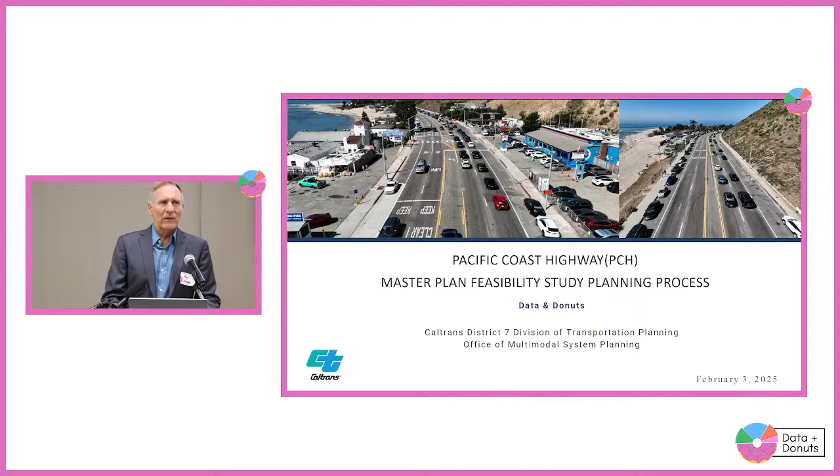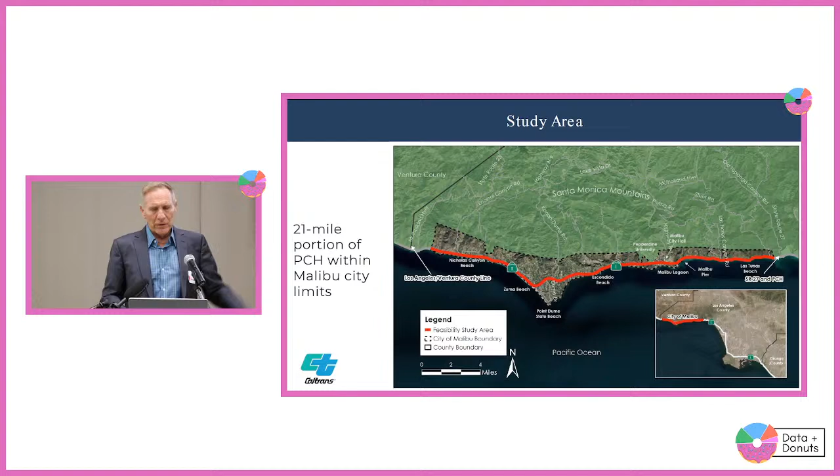That's where the initiative for this came from, and they pushed us hard with a very tight deadline. The study area for this plan is the city of Malibu. After this, we have another planning effort to plan the segments between the McClure Tunnel in Santa Monica and Malibu, and then further north on the Ventura side. But right now, the focus of this is really on Malibu.

We have a number of goals. The first goal was to reduce crashes and crash severity. When the 4 women from Pepperdine were killed a couple years ago, that just really shocked the community, on top of all the other fatalities they've been having.

And so it became a real priority. Simultaneously, you want to make safer accommodations for people who are bicycling or walking out there, as well as to make things more accommodating for people using public transit. The community, the city of Malibu—we've worked very closely with the city—they really want the Pacific Coast Highway to better fit in with the context of their community as well.

Right now, it's too much like a racetrack, and it feels like a highway running through a community. If you happen to live or work or visit that community, it's not a great match. So the goal is just to improve the character and have it fit better into the context.

We also need to preserve emergency access and access to beaches and mountains and businesses. It became very evident with the fires how important getting in and out of there is. And it's not just fires—it's landslides and other things out there that cause crashes as well. All the ambulatory calls that are out there, people need to get through. It's also an evacuation route. So these are our primary goals, and they somewhat conflict with one another sometimes.

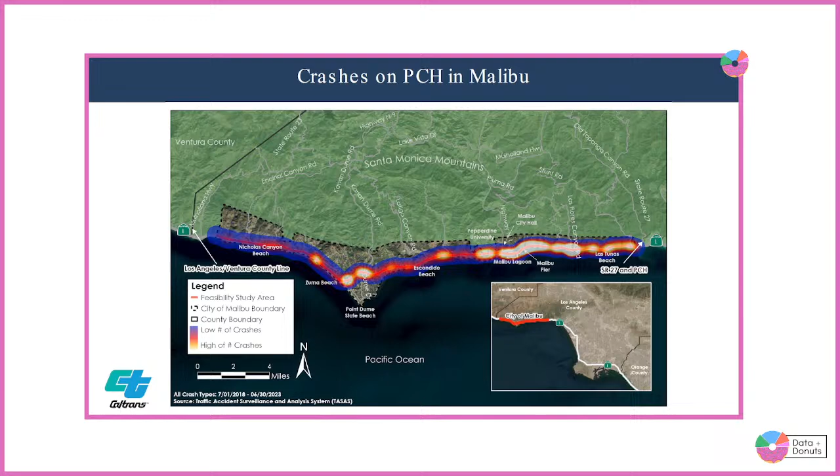That was important. We also wanted to know where the priority areas are. You see this white area here, which is where the Pepperdine women were killed. That's where we really had to focus a lot of our attention. People are going very fast there, so that was a really important area to address.

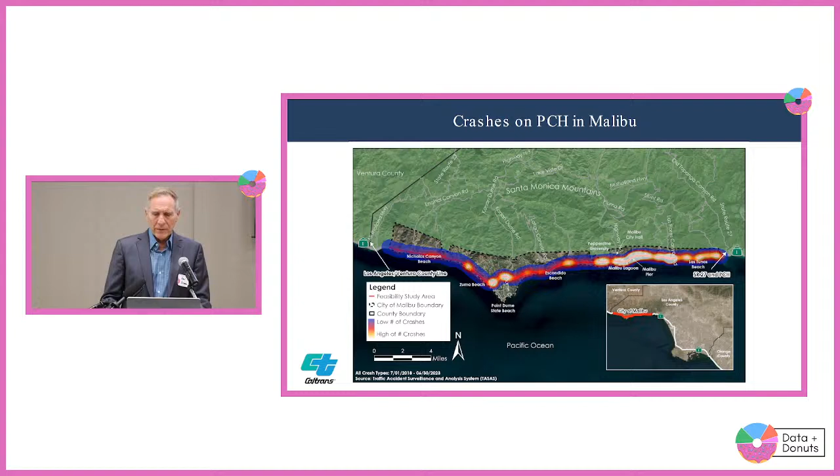We also looked at where bicycle and pedestrian crashes were occurring to try to understand that. So there was a five-fold approach to our community engagement. That was first with the community workshops and a charrette. The first one was a charrette and workshops, both virtual and in person.

We did two different rounds of surveys. We had an interactive website, which is still up. We also had quite a few stakeholder meetings, with different groups that we met with individually, and some individuals who were very connected in the community, and social media as well.

It was a bit of a challenge. One of our challenges is we had a community of people who live in Malibu who are very interested in what goes on there, and that's where we had our workshops, and we wanted to respond to them. But Malibu and the Coast Highway there, it's a state highway. It has to also serve people from LA who go to the beach there, or who go hiking there, or who go to restaurants there.

And there is an issue of disadvantaged people—this is their beach access. So having to balance responding to what the community wants with understanding that it's also serving people outside was a real challenge. How do we reach a huge audience in the whole region area?

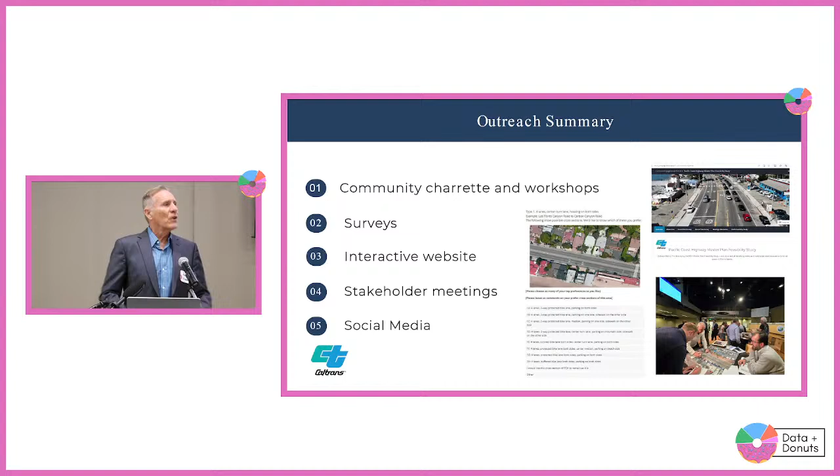We did have quite a bit of local television coverage, and we tried to spread out as much as we could, but as always, the people in Malibu thought we were paying too much attention to people outside, and some of the agencies representing outside thought we were paying too much attention to people in Malibu. So that's one of the things we ran into.

The July workshop was a really important starting point for us. This was a charrette format. If you're familiar with the charrette format, it's an attempt to get the attendees to actually participate in the formation of the plan. And we identified five different typologies of the highway and the adjacent land uses.

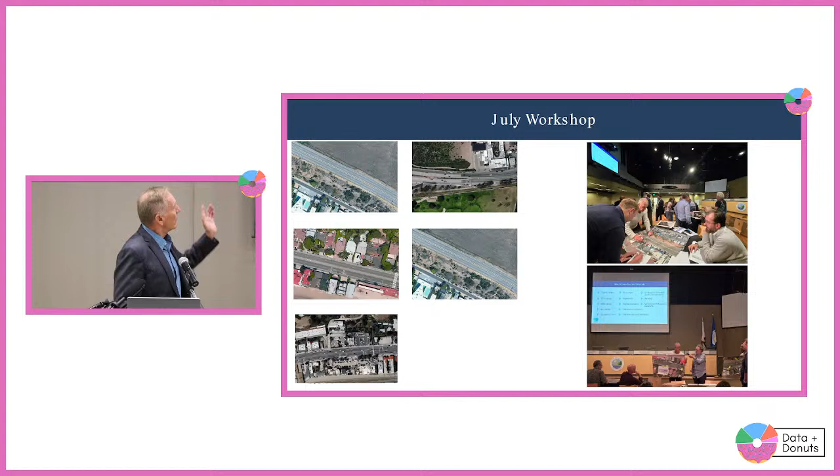The one at the top left is what you run into first when you come into Malibu, mountains on one side and houses along the beach on the other side. As you get further in, this second one is the Carbon Beach area, with housing on both sides, getting into a pretty busy part of town. Then you get to this bottom left area, which is the central commercial area near the pier.

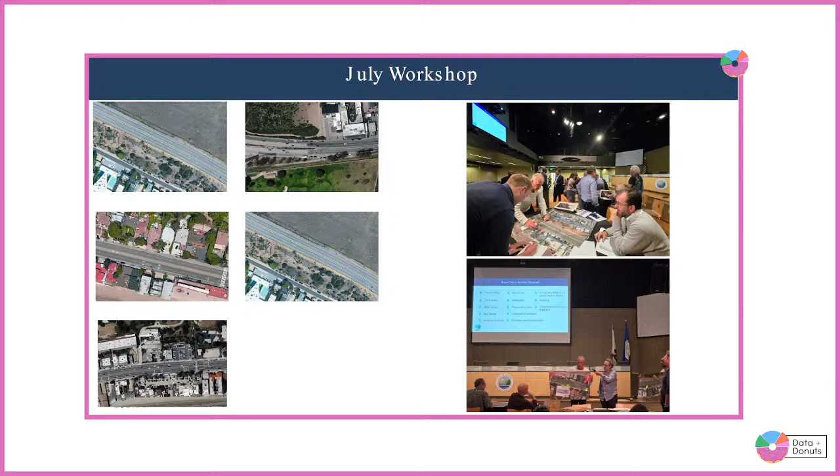And by the way, these other two types are also found in other segments of the Coast Highway. So they were representative. The one up there is a very specific place, that central area near City Hall between Cross Creek and Webb Way. And then the last one there is sort of nothing on either side of the highway. It's just open, even though there are homes closer to the beach. The highway itself doesn't have adjacent land uses.

So for each one of these 5 typologies, we broke the people into work groups. Tell us, what are your priorities as far as what you would like to see in the cross-section of the highway? We've got limited space to play with, and we've got all these different competing goals. How do we best mix that limited space?

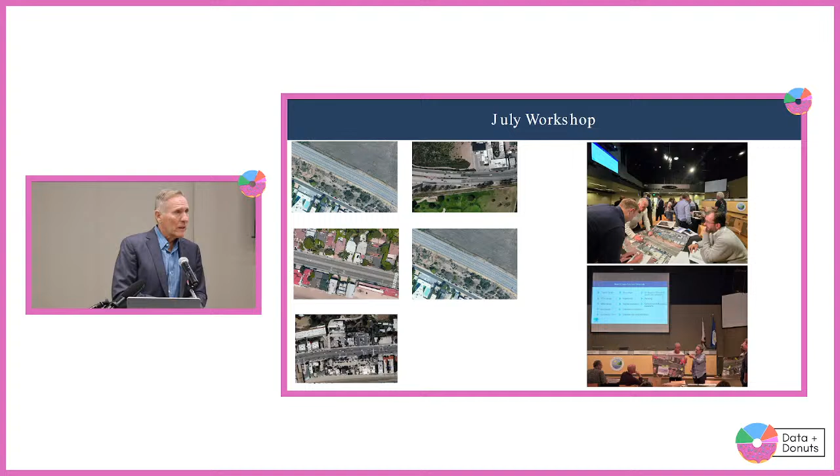So the different types of cross-section elements might be travel lanes, turn lanes, bike lanes, walking areas, parking on the mountainside, parking on the beach side, bus lanes, and a number of others. So we have all these things, and we ask people for each one of these typologies, what are your preferences?

What are you willing to give up if we can't have everything in there? What do you really want to see stay in the highway? That gave us an initial readout as to how we can start to plan, because something's got to give. We don't have enough space to do everything out there. So something's got to give if we're going to change.

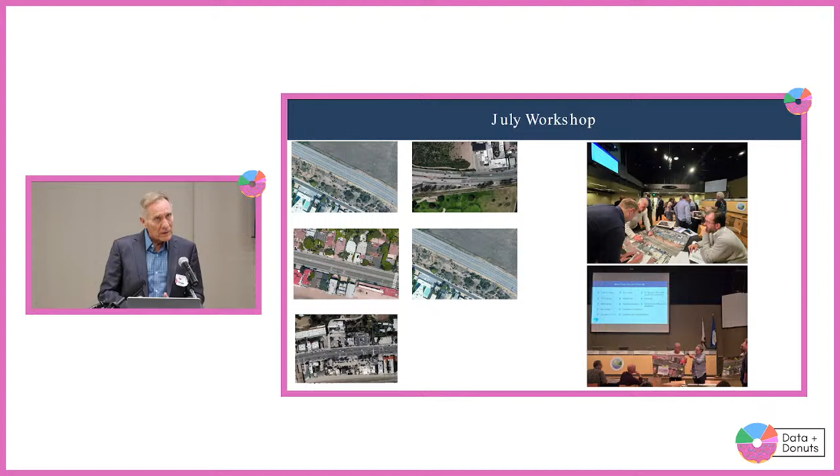Our stakeholder meetings, these are pretty much the list of the different stakeholder groups that we met with. There were some local residents who were very engaged and vocal. One of them had his daughter killed back around 2010 or 11, and he started an organization that's been very active since that time. And some other residents, one of whom just got elected to city council, but also city staff, highway patrol, the sheriff, the fire department, a labor exchange.

So Pepperdine, Coastal Commission, Mountains Recreation, Chamber of Commerce, Streets for All, Streets for Everyone, Surfrider Foundation. These were the groups that we had individual stakeholder meetings with to try to get their input individually. These were hour, sometimes 2-hour-long meetings. We really wanted to hear from all of them.

So when we had the first round, we did the charrette, but we also did the same kind of thing in a virtual workshop. We asked people, and we had this survey online. Again, for these different 5 typologies: what are your priorities? What are you willing to give up? Rank them.

Bike lanes and sidewalks came out number 1 and 2. Bus stop improvements were also very important. When we got down to parking, parking on the beach side was more favored than parking on the mountain side, but we noticed those are getting lower on our priority list. Keeping the center turn lane was kind of lower on the priority list. If we have to get rid of the center turn lane to create space for bike lanes, people seem to be willing to do that. The one thing that ranked dead last in every survey and everything we did was keep the highway the same way.

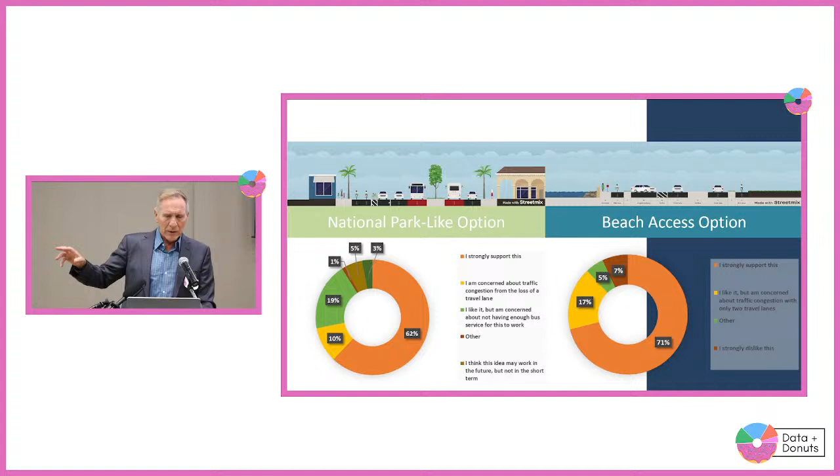The other option we put out there was a beach access option. On the far west end, the traffic volume has dropped quite a bit, and we could get by without 4 lanes. We'd do 2 lanes, which would enable us to put in angled parking on the beach side, add parking there, make sure we've got really good bike lanes, and 71% of people said they strongly support that.

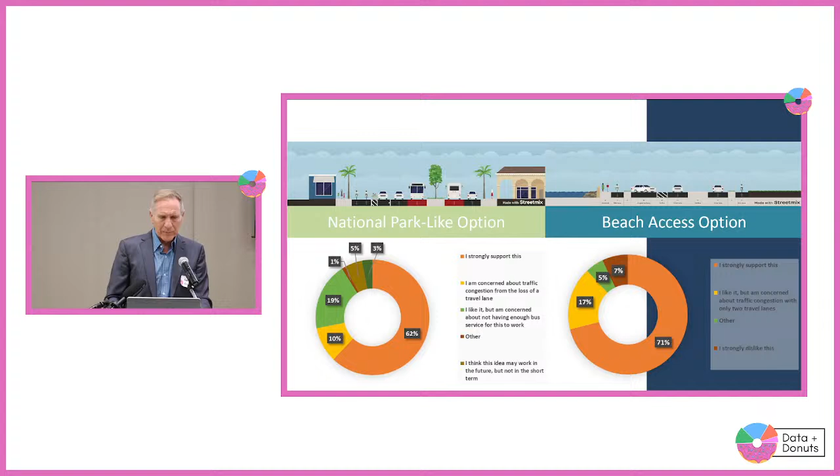So that was, I thought, interesting. So then we looked at what are the tools, the toolbox? What kind of tools can we use? What countermeasures can we apply to fix the highway?

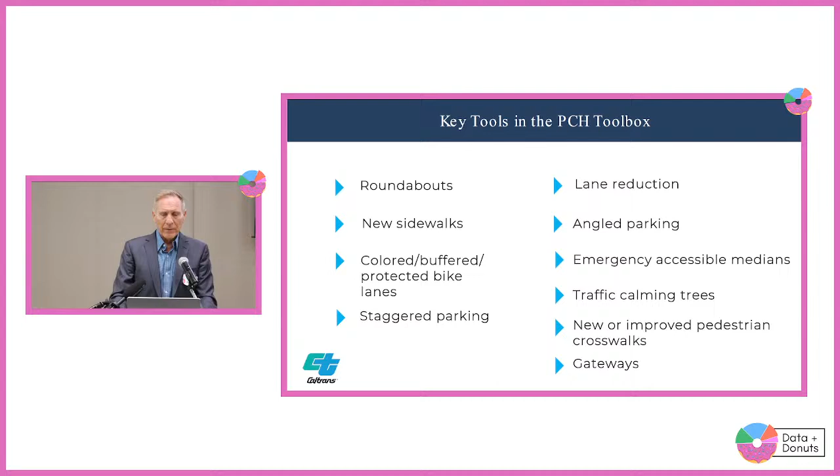People really like the roundabouts. Roundabouts do have a very good safety record. They are significantly safer than signalized intersections. They also generally have about 30% more capacity to handle traffic than a signalized intersection. They eliminate conflict points. So we proposed roundabouts at 9 different locations.

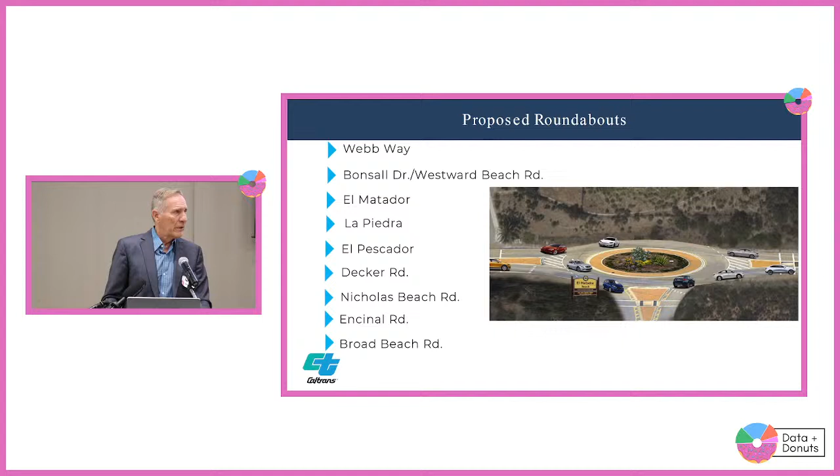There were some areas where there are no sidewalks at all, and some areas where there's no sidewalk leading up to a bus stop. So we needed to add it there, because you absolutely have to be able to have ADA access to a bus stop.

And when we're adding the angled parking, we wanted a safe place for people to walk to the beach. Right now people are parking along the beach, and they're doing two things we really don't like: they're walking in the highway from their parked car to the beach, which is very narrow, or they're parking on the mountainside and running across the street and walking along the highway. Those were two crash types we really wanted to eliminate.

By the way, last year Senate Bill 960 passed. That requires Caltrans to have good bicycle and pedestrian facilities on state highways. The segment of the Coast Highway, let's see...

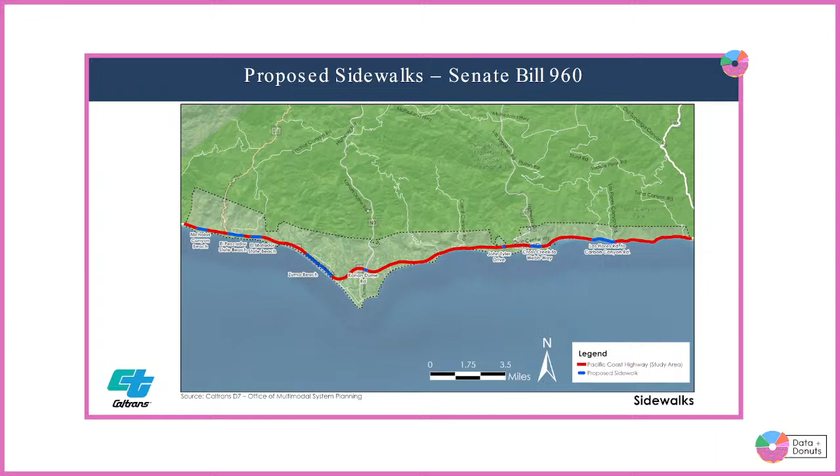Right here, Las Flores Road, Carbon Canyon, just as you're coming into the city, there are no sidewalks. There are no sidewalks, and it's very narrow. So we absolutely felt that we had to add sidewalks there.

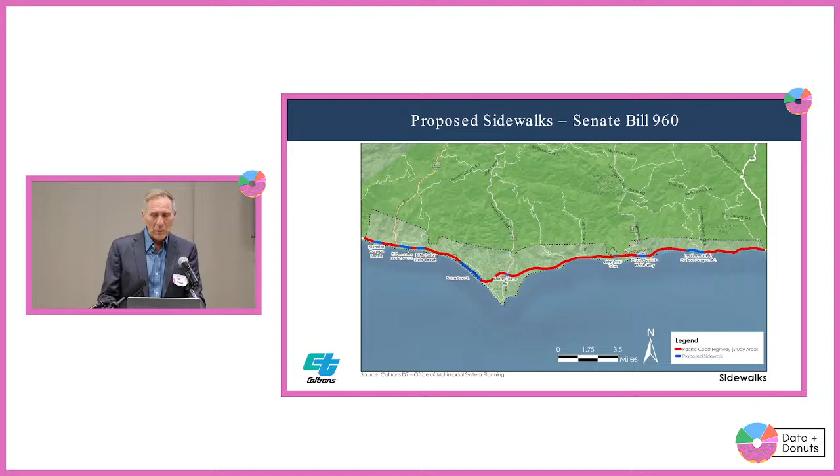In order to find the space for the sidewalks, we're proposing taking out the center turn lane. And it's a bit of an issue, because some people that live there are saying, well, how am I going to turn left and come out of my home, or how am I going to get in and out of my home? So it is a real issue, but we have to put sidewalks there, and we have to put bike lanes where we've got them. That was something we absolutely needed to do.

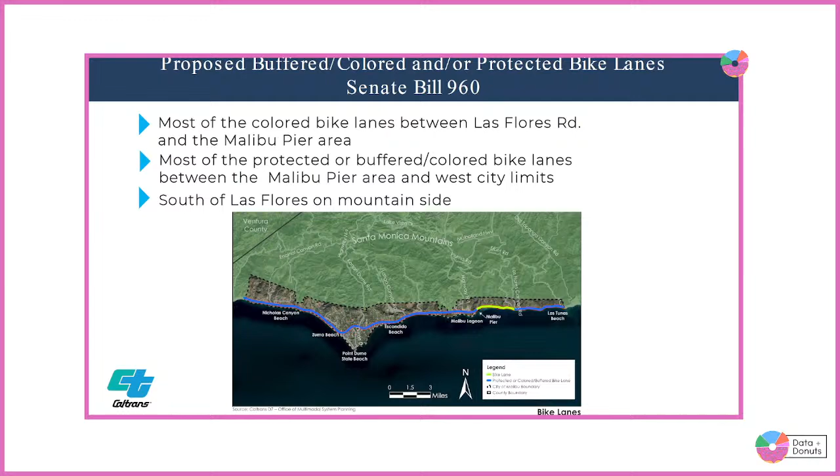We proposed buffered or colored bike lanes and protected bike lanes the entire route. Up here on this map, the blue area could either be the physically separated, protected bike lanes as an option, or the other is just what we call a buffered bike lane — a bike lane with a little bit of painted stripe separating it from the travel lanes.

Here's another issue with different stakeholders. Most people want protected bike lanes out there, but the city isn't crazy about that because a lot of the people bicycling right now are experienced cyclists, the club riders who ride in big groups. They're concerned, and I agree, that a protected bike lane will confine their movements a bit. They're also worried about trash collection, since protected bike lanes need to be swept, which is an issue with that kind of lane.

For this feasibility study, we found both options feasible. The area shown in yellow is the Carbon Beach area that just burned. There are a lot of homes along there, a lot of driveways, and it's not a great place for protected bike lanes because of conflicts with driveways and parked cars. So that area was planned to just have striped and colored bike lanes.

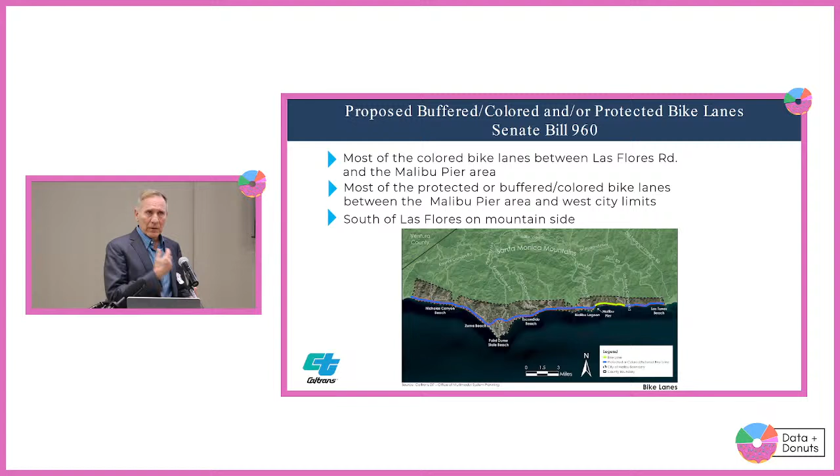We proposed staggered parking. In order to eliminate the issue of people parking on the mountainside and crossing over, and to get the space for bike lanes, we removed parking from one side, the mountainside where the beaches are.

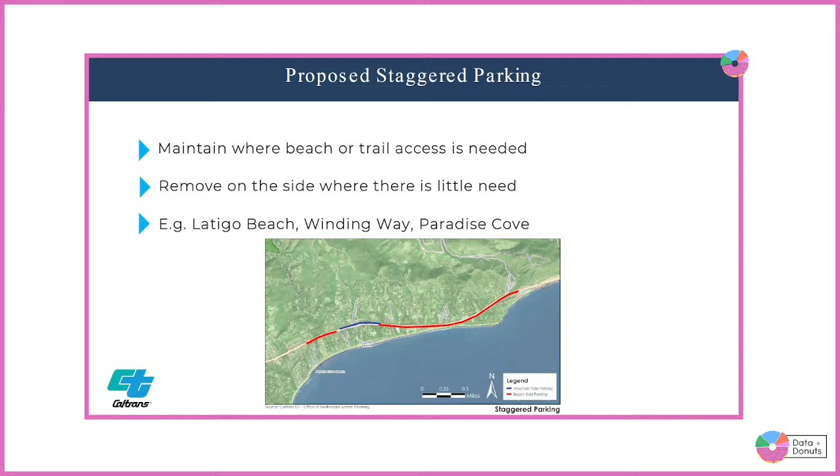There's a stretch near Winding Way, which is a really popular trailhead for Escondido Falls, a really nice waterfall. In that area we left the parking on the mountainside, close to the trailhead, since the parking lot there only has about 13 spaces and people frequently park along the road and walk. So we kept parking on that side but eliminated it on the beach side in that area.

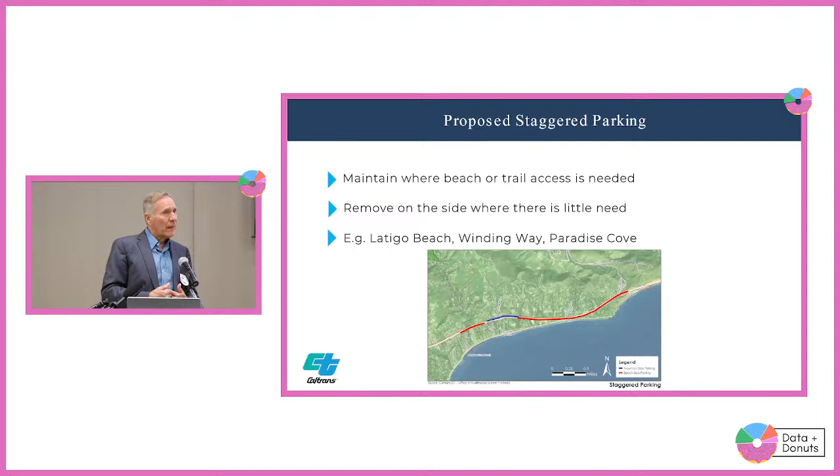These are the areas where we reduced the lanes and added angled parking, mostly on the west end.

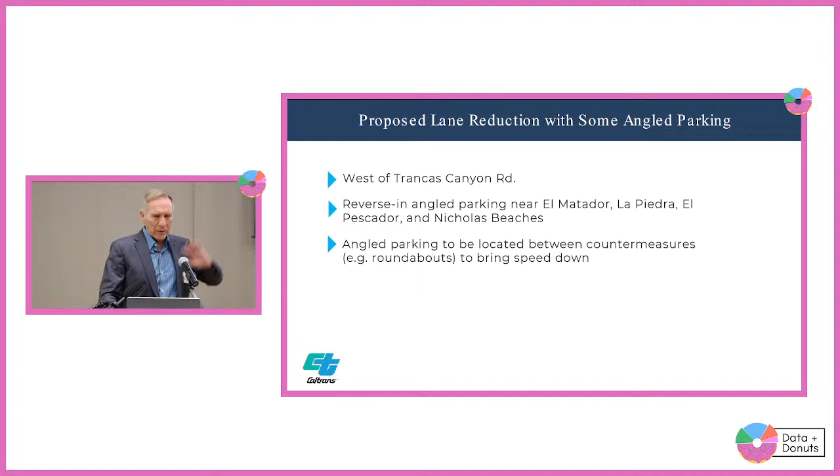Some other tools here: traffic calming trees with canopy do calm traffic. That Carbon Beach area I showed you, which had so many crashes, is where people are speeding. The guy who hit the four women two years ago was going 104 miles an hour. So we're looking for different techniques to slow traffic, and it's not easy to find ways to do that in a context like this.

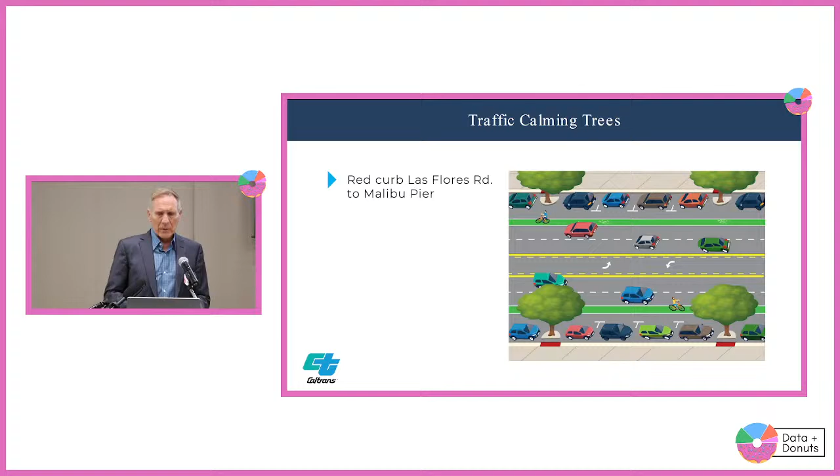But putting islands with trees between parked cars is a technique we hope to use out there.

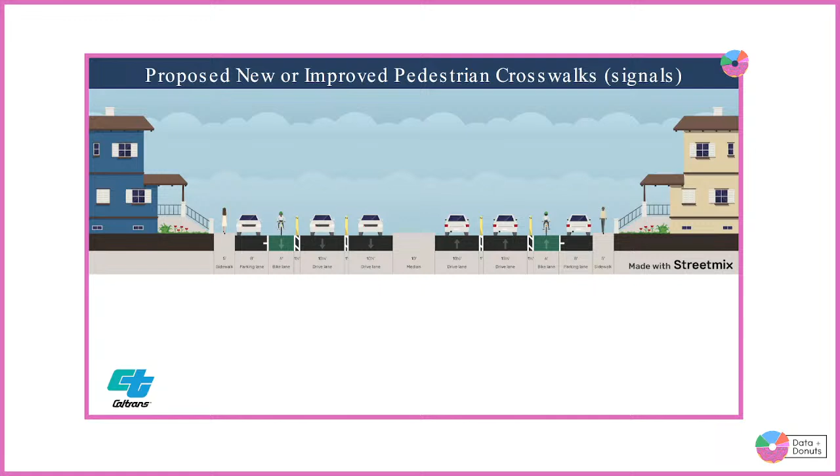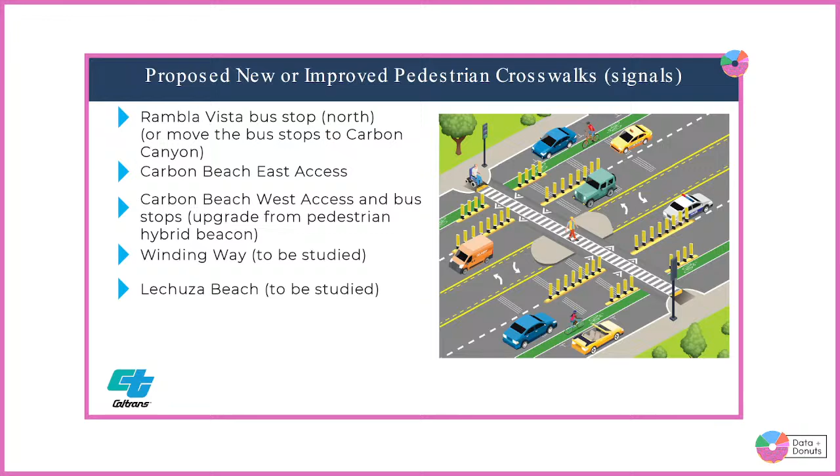We're putting new crosswalks in, and right at those crosswalks we're planning to do some things to slow vehicles down, channelize them, put in crossing islands for pedestrians, and add new signals. We put a few of these new crosswalks in hoping to slow cars down, plus some new crossings where people need to cross. This map shows where we put new or improved pedestrian crossings.

People really like the idea of gateways. Gateways tell you that you're entering a new context, a different kind of place, and that maybe you need to slow down going through here, treat it differently since it's not an open highway anymore, you're coming into a community. The idea of using the gateways as public art was something people liked, so we looked at three different places that would be appropriate for gateways.

We measured the entire stretch with a laser device, so we have fairly accurate measurements of either curb to curb or pavement edge to pavement edge. The one thing we didn't get is the encroachment from people who live on one side of the highway into the right of way, since we don't have good records of that, so we had to work with what we knew. If we get better records, that could change the plan, but we took the information we had and planned the cross section for every stretch.

I'm just showing you a couple of samples here, and we gave options. Here's that really tight stretch between Las Flores and Rambla Vista, where we had to get rid of the turn lanes. We added sidewalks, colored bike lanes, and kept the four lanes of traffic.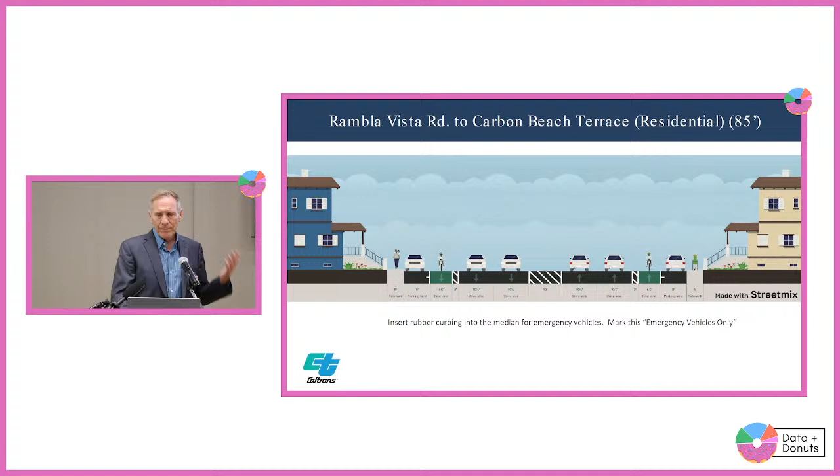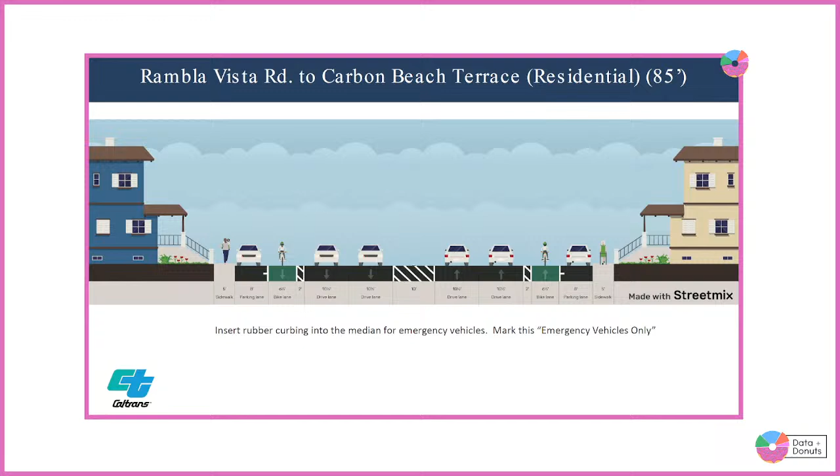Here was a little bit further up, maybe an emergency vehicle lane in the middle or a turn lane in the middle, with buffered bike lanes. We did the same kind of thing the whole way. And here's getting into that commercial area where we could have it without the landscape median or with the landscape median.

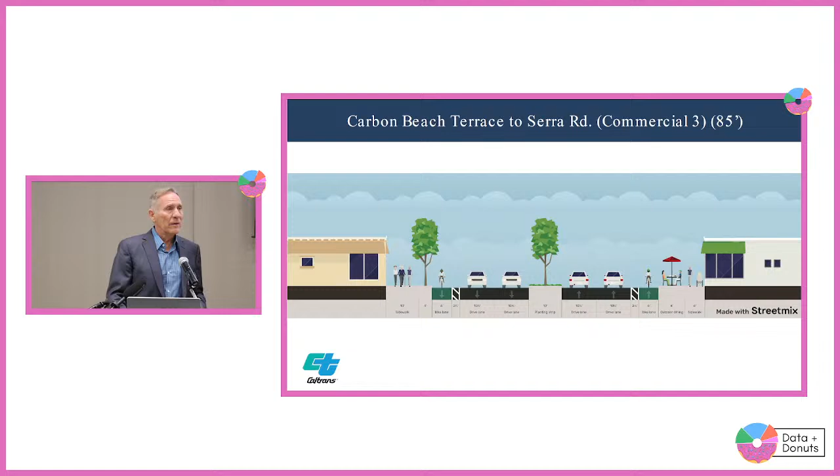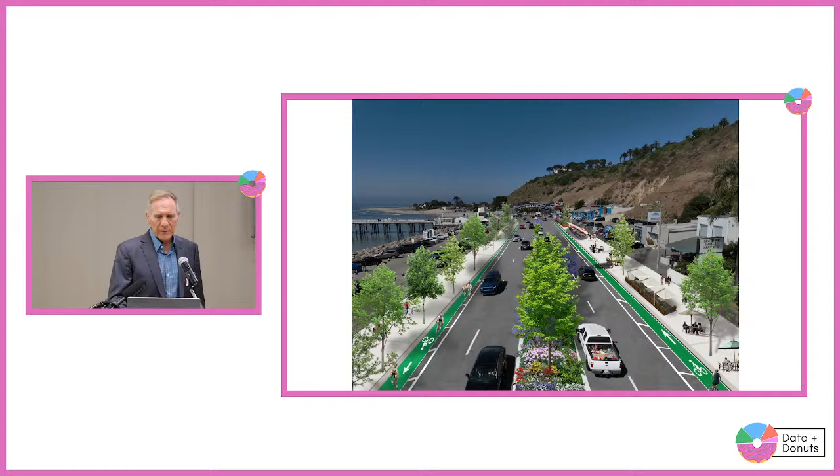We did a few renderings to show what the landscape median might look like. This is keeping the same sidewalk and just adding the median. Or what if we took out the parking and added widened sidewalk space, creating some place for outdoor seating and dining and the like. Just another option for people to think about when it comes decision time. We did the same thing all the way up to the north city limit with different options. So those were the linear improvements.

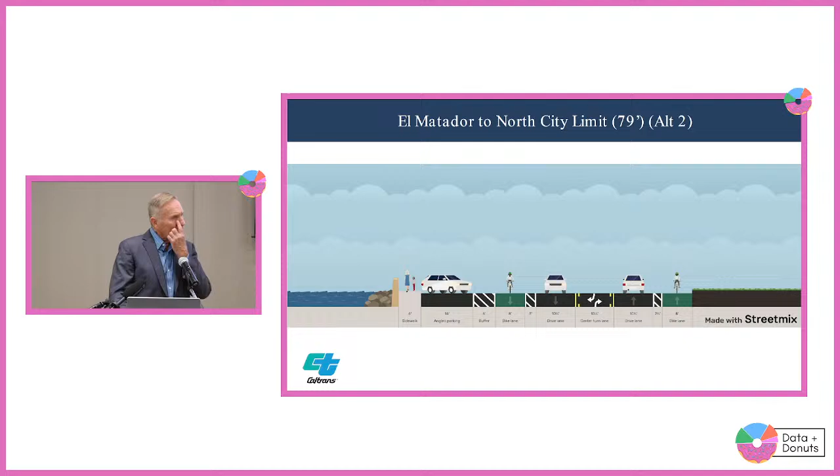We also looked at the intersections that had the most crashes, 11 intersections in total. We applied a set of countermeasures to each one. I won't go through all of them, but just to give a sample, here's a place at Bonsall Drive and Westward Beach Road. There's a curve there where people coming out can't really see because of the vegetation.

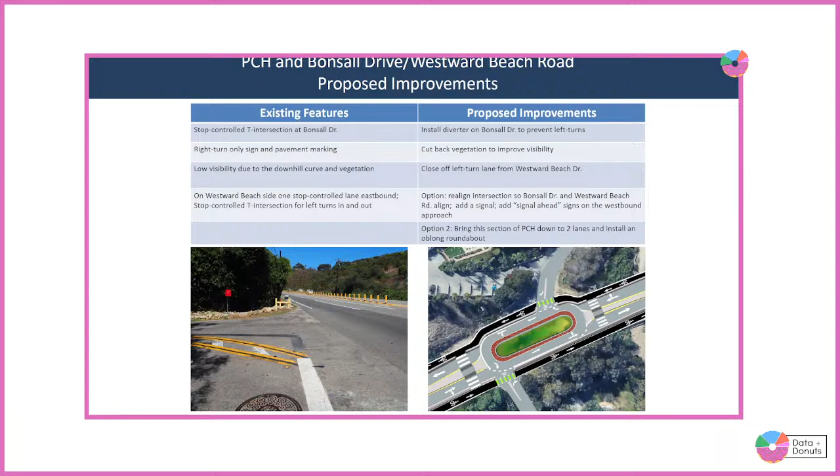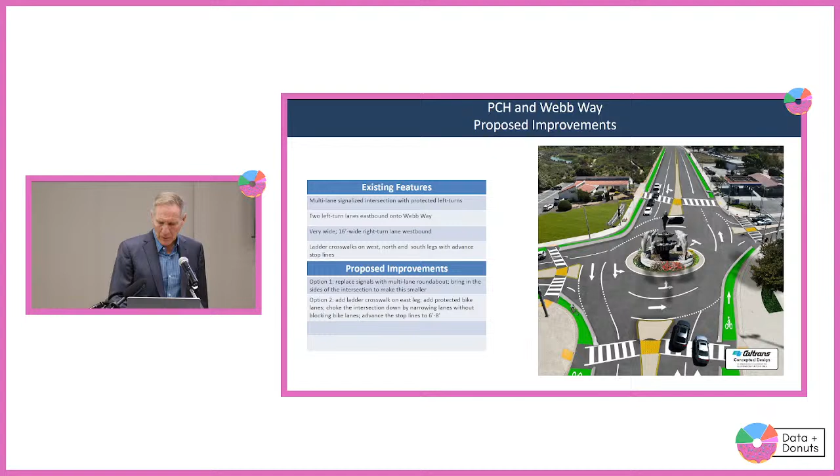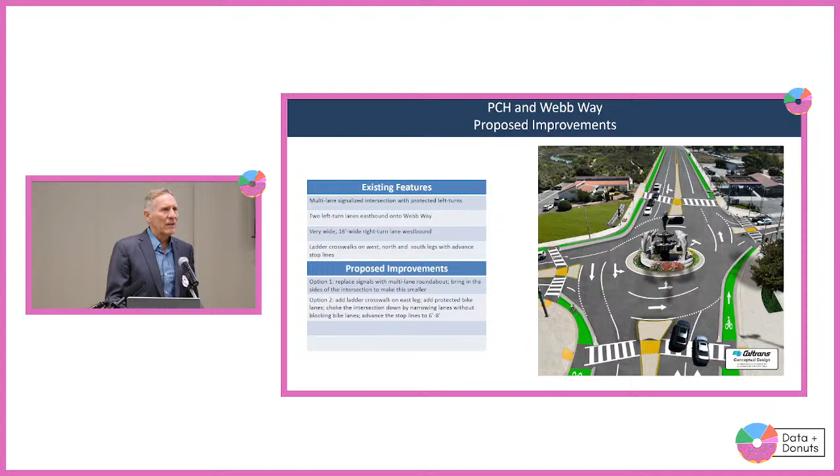So we planned a number of things there. One option is to put a roundabout in. Roundabouts don't have to be round, in this case it would be oblong. Here's a roundabout - the Webb Way roundabout is the only multi-lane roundabout we proposed, but that could also serve as a gateway. The advantage is that it's a 7-lane highway out there, huge and not hospitable to human beings. To try to tame that a little bit, with roundabouts you don't need turn lanes, so you can take 7 lanes down to 4 and have a safer, more beautiful intersection. So that was something we proposed there.

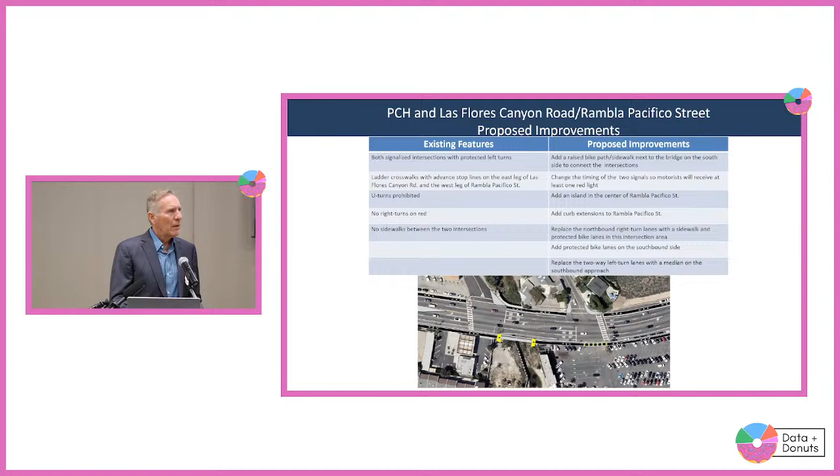Then the intersections of Las Flores and Rambla Pacifico Street had a lot of issues. So we proposed some protected bike lanes there and some curb extensions and a number of things to slow down and tame the traffic and provide space for people and bikes to go. We did that sort of thing with different techniques at all 11 intersections.

Also looking at vehicle-to-everything applications - this is a conversation we were having earlier. V2X is communication. We've got vehicle-to-vehicle communication, where one car talks to another saying 'I'm here, don't hit me.' We've got vehicle-to-infrastructure communication, which we're about to embark on a plan to put in district-wide on the state highway system, where communication equipment will talk to the cars and notify them of things up ahead.

The type of thing this communications equipment could do is have speed enforcement cameras, and that actually was passed by the state legislature to put them out there - cameras that communicate in real time with the sheriff. If somebody's going 85 miles an hour, the sheriff will know about it right away and have information on them.

The technology we've got will work much better when each vehicle has a transponder to receive that communication. We're not there yet, but in time that will happen. Emergency vehicles will be able to communicate to drivers much better that they're coming. And in the future, we're going to be able to actually manage vehicle flow in a way that says the speed limit's 45, your car can't physically go faster than 45 - it'll be governed that way. This kind of thing could be a real solution to places where we were struggling to find countermeasures to slow vehicles down.

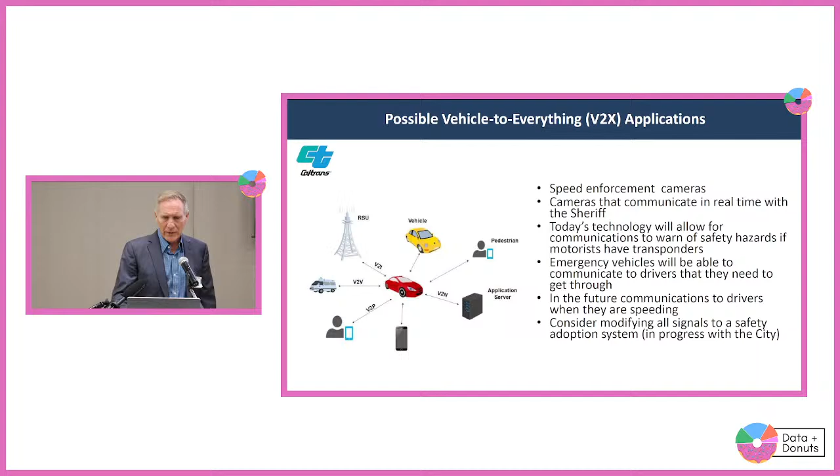So, things to come. We also did a parking analysis. One of the issues we're really running into is that the Mountains Recreation and Conservation Authority and the Coastal Commission do not like any loss of parking - they view that as access. So what we did to try to address that was remove parking in some places, but with angle parking, we added a lot of spaces. We believe we added them in places where they are more valuable than the places we removed them from. We ended up with something on the order of 900 approximately gained spaces.

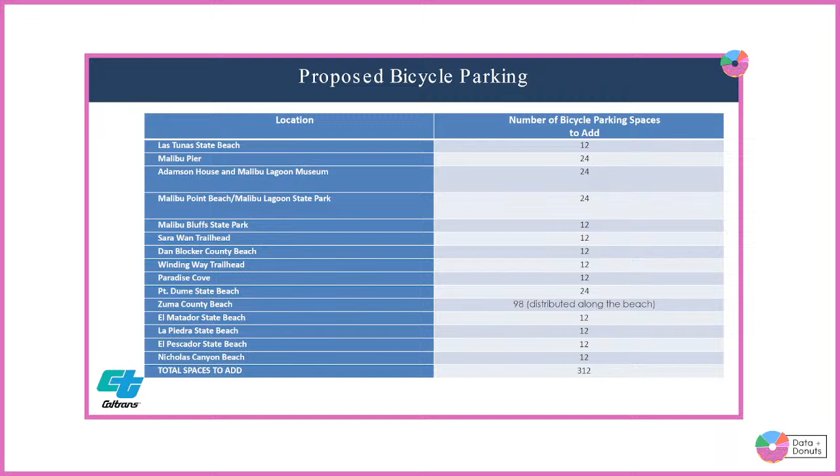We are also adding some 300 bicycle parking spaces. We're still not quite there with the Coastal Commission, but especially the Mountains Recreation and Conservation Authority - they just want us to not remove any parking anywhere. So that's an ongoing issue.

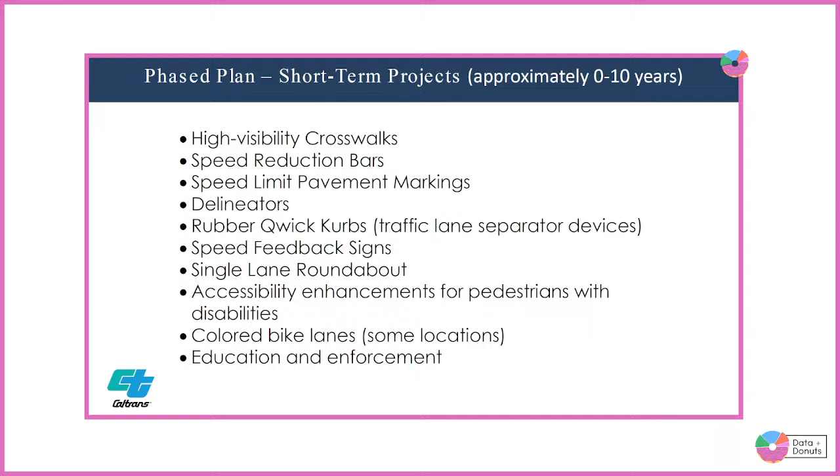We produced some planning-level cost estimates, identified funding sources, and then did a short-term project list, medium-term project list - this is really rough right now - and a long-term project list. And then we've got a website with a portal and all of that.

So that concludes the presentation, and I can open it up for questions and comments. Yes, thank you.